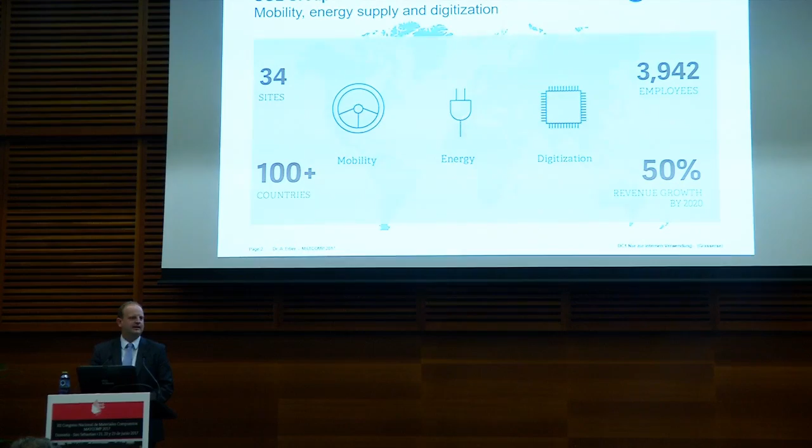SGL Group in the past worked, and also today, with the element carbon. But our roots are not carbon fibers, it is carbon electrodes, big electrodes used for recycling and melting steel. So the electrode steel, you use this electrode and consume it during the recycling. But due to the steel crisis, which had its kind of origin in China, we had some problems, and we sold this business unit to a Japanese company, Showa Denko, and the remaining SGL Group is presented here.

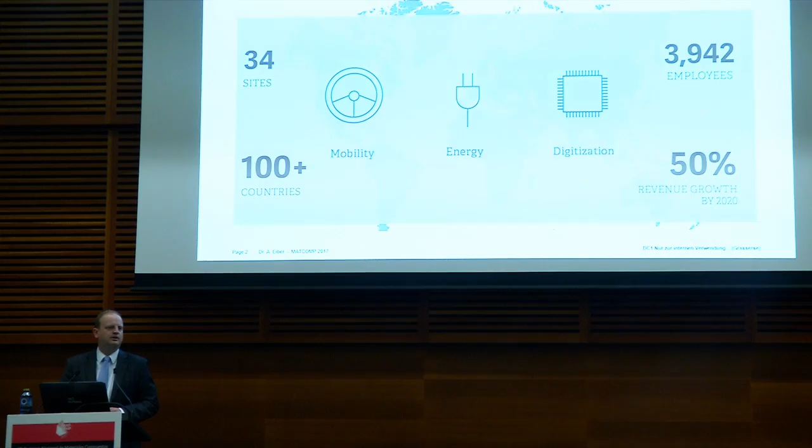We have two business units. One is a business unit for graphite materials and systems, so many of your cell phones, the lithium-ion battery anode material will be from us. A big electric-driven car out of the US has its electric battery system provided with our material. These are the things GMS is doing. The business unit where I belong to, Composite Fibers and Materials, yes, we have carbon fiber, but there is even more, and I will show you that in relation to automotive.

We invest nowadays, we want to grow 50% on the basis of 2015 turnover, in 5 years. So it's an interesting time, and in this time you can shape things, for example the Lightweight and Application Center.

The agenda of the presentation, I'll try to be in time, 45 minutes. Motivation and state of the art, where do we come from, automotive, what do we do today in general, but also SGL Group. SGL Group addresses the biggest automotive composite programs we have nowadays, and what will come next.

So coming next, comprehensive material systems. What can we offer here? What can we do in terms of supply chain? What can we do in terms of process chains? So I will show you some ideas, innovative materials and process chains.

And then last but not least, and this is something you already know: just taking a part and changing nothing but the material, from metal to composite, this will never ever be a success story. It will not be light, it will be heavy, and it will cost too much. So therefore, addressing upcoming automotive components means starting with a white sheet of paper and going for design and engineering, and then design and engineer again. That's the key to enable automotive in the future, and I will show you our thoughts on that as SGL Group.

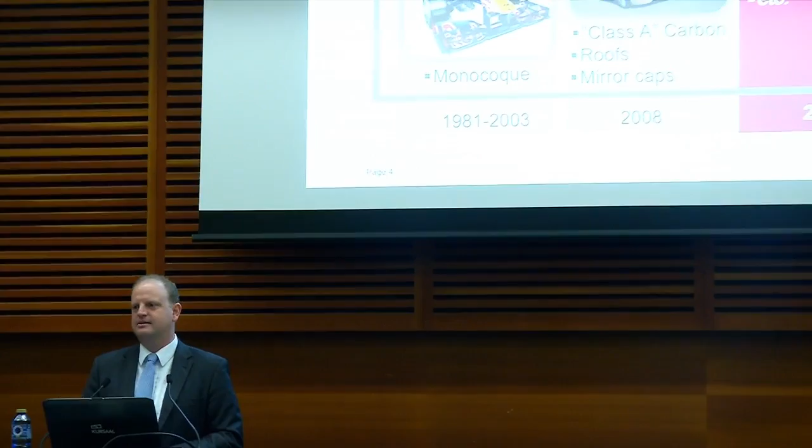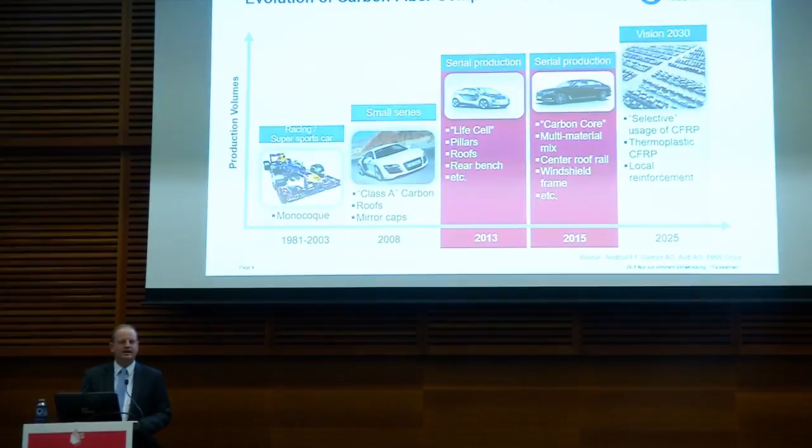Composites has a history coming from aerospace for sure. In automotive, you all know, on Sunday, Formula One race cars, everything done by hand. A rich race car team has 7 monocoques for each season, so that's the volume they have. They do it in pre-preg and autoclave, by hand. This is not related to automotive. Formula One is not automotive. It's great fun, but it's not the thing we are looking for.

Then we had the first small series, also as SGL addressed that. Audi, for example, the R8, Class A carbon, it looks very nice. You sell the look, therefore the price level is somewhere, but it's again not the thing we all want to discuss today in automotive.

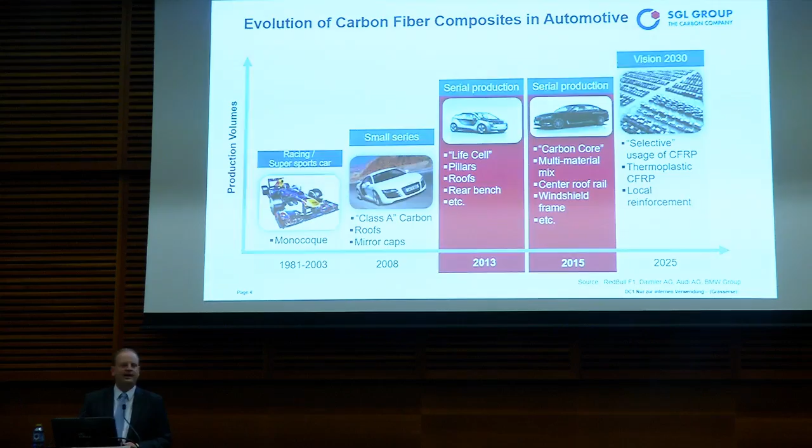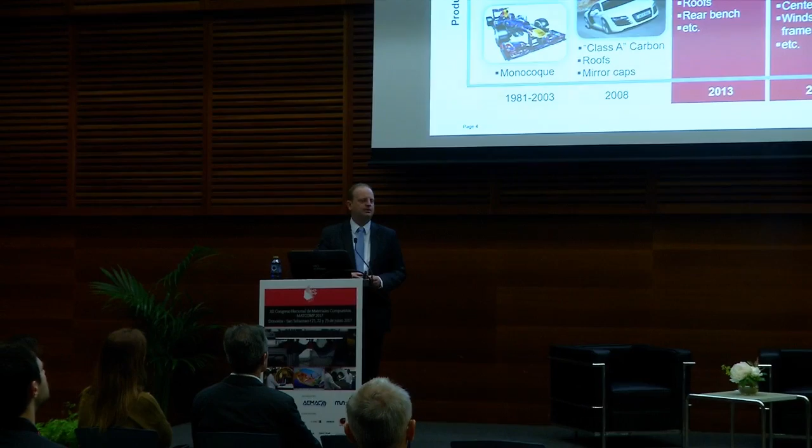One major step was the i3 and i8. Here, an OEM started with a white sheet of paper, drawing a carbon composite life cell. We built up together the infrastructure, the supply chain, and I will show you that BMW has made its lessons learned, because another product on the street nowadays, the 7 Series, addresses carbon totally differently compared to the i3 and i8.

So, the carbon core technology of the 7 Series. And what will come next?

Vision 2030. We will see that we will have a mixture of materials: high-strength steels, aluminum, and composites. Composites means glass fiber. At dedicated load paths, we will see carbon fibers. And if we are talking about carbon fibers, and we want real high volume, more than i3, i8, or 7 Series, real high volume, we will see many, many applications in thermoplastics. So thermoplastics reinforced by glass fiber, with dedicated areas reinforced by carbon.

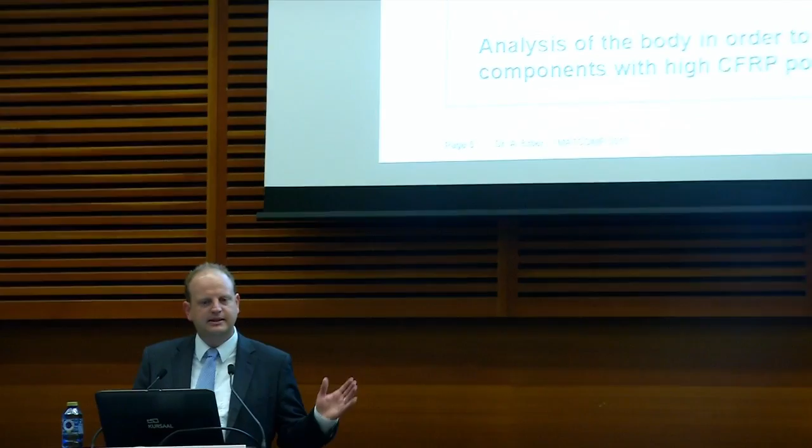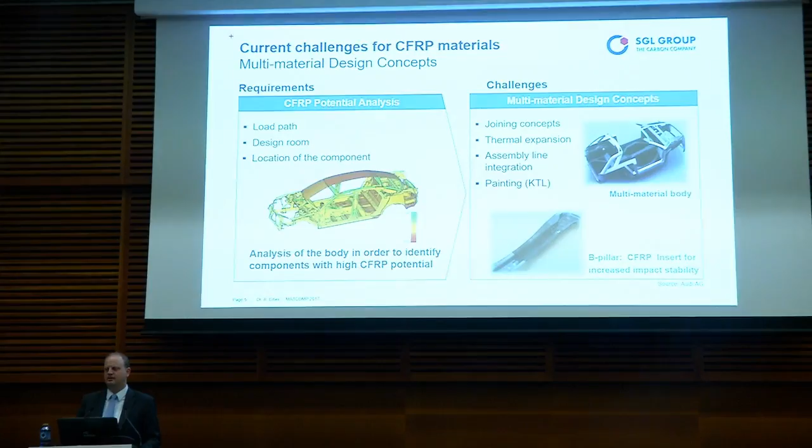What are the requirements? First of all, if you want to go into composites, you should analyze your car. This is one example: Audi developed this tool together with a university to look at where the load paths are. If you have a component like a knot where you have very isotropic load paths, maybe die casting of aluminum is a good solution.

But if you have parts, components, like the windshield or the B-pillar, where you have clear load paths, then it makes sense to use carbon fiber, because a carbon fiber with a clear direction can use its performance very well. But then again, this means don't make a quasi-isotropic laminate—that is not the right approach. I know we have it today, but in the future we will also see laminates which are really load-path oriented at these kinds of components which I showed.

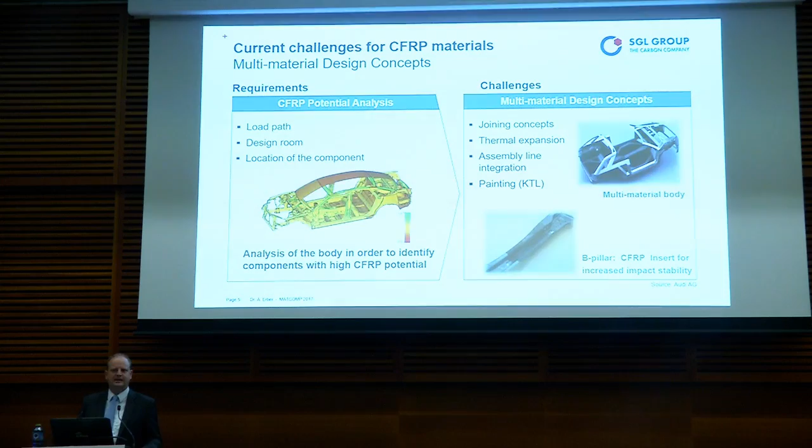But then there are still some open challenges. How do you join these materials? Multi-material design, you have to bring them together. Different thermal expansion, delta alpha topics. How to cope with corrosion, how to integrate such components into existing assembly lines. Existing assembly lines in automotive mean spot welding, and now we have composites here. E-painting, the KTL, is a challenge. So these challenges can all be addressed through process chains, and that's a nice thing for us, by the materials.

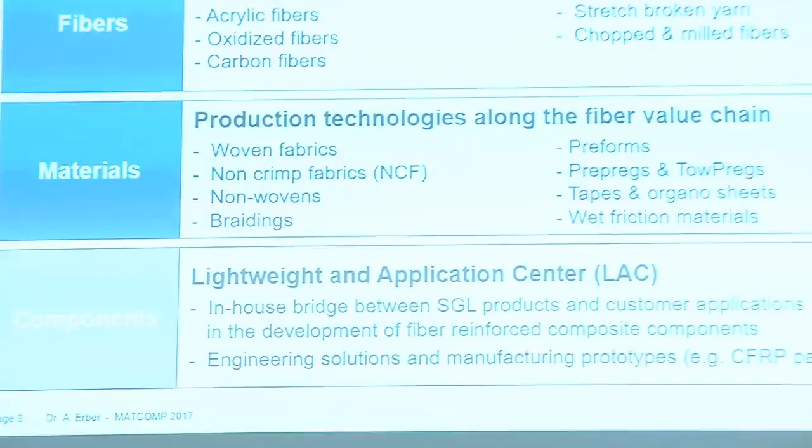We have some materials, yes, we have fibers, we have carbon fiber, that's true, but we also have acrylic fibers. Why do we have acrylic fibers? Because we need them as a source for our precursor. So we produce our precursor by our own. We also have precursor supply through a joint venture with Mitsubishi Rayon. So there are different sources. The precursor, polyacrylonitrile, is an acrylic fiber.

Therefore, we have a plant in Portugal, next to Lisbon, for acrylic fibers. And we have an acrylic fiber business, going into clothes, roofs of convertibles, tennis balls, things like that.

And the precursor for the carbon fiber - yes, we have carbon fibers. We have oxidized fibers going into aerospace, for example brake discs. We have some specialities like stretch broken yarns, chopped fibers, and many other materials.

You see the list of materials, starting from textiles, woven, non-wovens, non-crimped fabrics, but also impregnated textiles like prepregs, or in the thermoplastic world, organosheets and UD tapes.

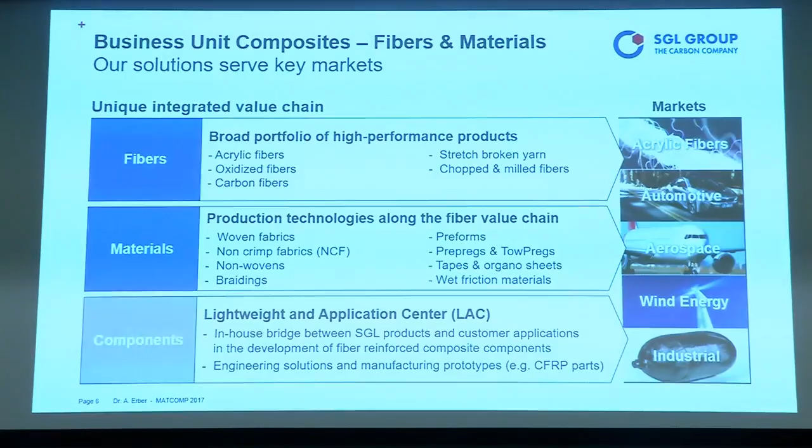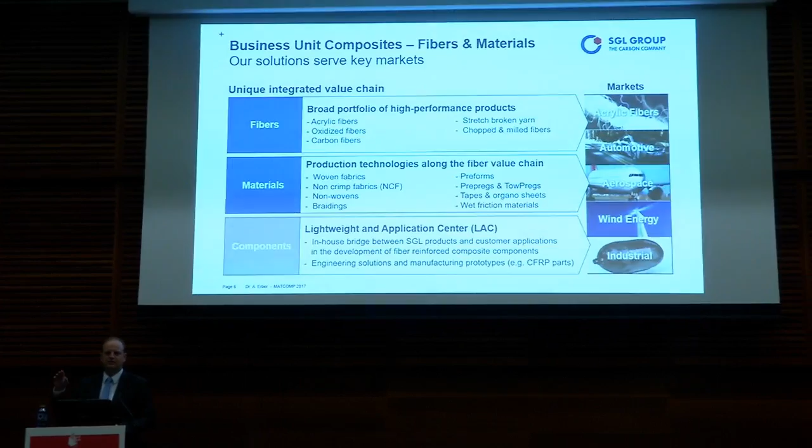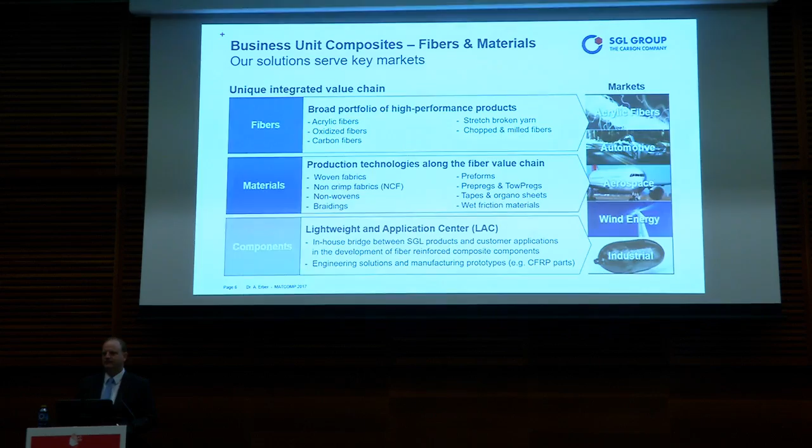And we have this activity, lightweight and application center, because we learned - and I will come to that later - that just putting a material on the table, having a price tag on it and some mechanical data, nothing will change. It will happen nothing. You have to support your customer to bring the material via design, engineering, prototyping to an application. And if this application is good with respect to costs, lightweight, but also robust production, then you have a chance that this component will be in composites, and then companies like SGL have a chance to sell a material.

We have a global presence, not very strong in Asia today. We have to change that. So it is very focused on Europe.

So we have the precursor plant, following now the process chain. We have the precursor plant in Lavradio, together with Mitsubishi Rayon precursor joint venture in Otake, Japan. We have two sites for the carbon fibers, one in Scotland at Muir of Ord. You don't know Muir of Ord, but you know Loch Ness - it's next to it. At Loch Ness there is the carbon fiber plant. Another one is in the US at the west coast, Washington State, Moses Lake.

Then we have several material plants in Gardena, California, Philadelphia, and in Germany - north of Germany, south of Germany, Wackersdorf in Bavaria. And together, you may know, with Benteler we have a joint venture, Benteler SGL, producing components together. So it is from the acrylic fiber downstream to the component and the assembly of modules, what we are covering as SGL Group.

Comprehensive material systems. You will find this kind of puzzle three times because we are talking about toolboxes. This is our textile toolbox. We also have a thermoplastic toolbox and a thermoset toolbox. Textile toolbox means we have textiles like woven materials, fabrics, non-crimp fabrics, but also smaller, thinner, not as wide textiles to do local reinforcement, and non-wovens to have a more isotropic behavior.

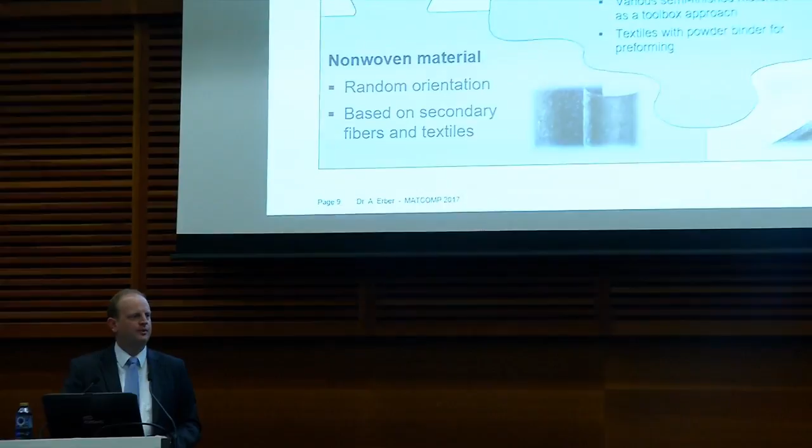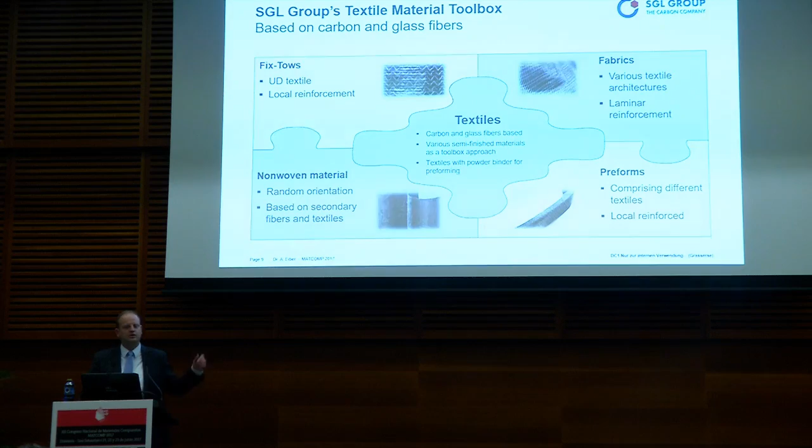And you can get these textiles with different sizings on the carbon fiber. A sizing which is friendly to epoxy, a standard sizing you already know. We also have sizings dedicated to thermoplastics, and in the thermoplastic arena we have also developed a sizing which works pretty good with in situ polymerization, so processing caprolactam for example, you can do with these kinds of materials.

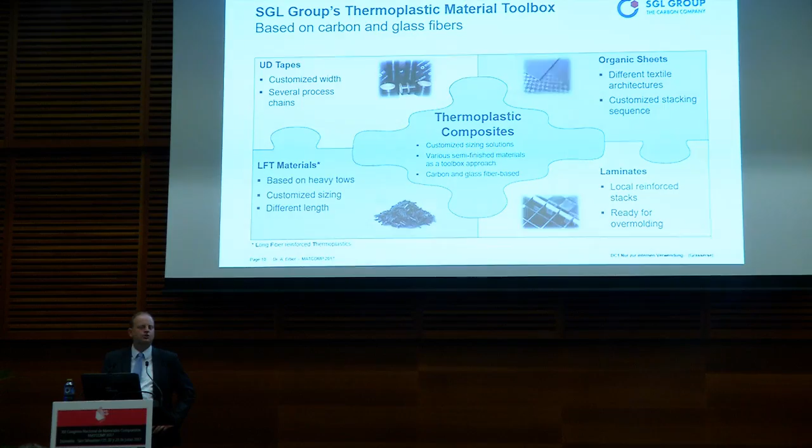And you can combine all of these materials, therefore toolbox, and this puzzle is kind of how we want to show it to you. And you can have it in carbon and in glass, and again that's important, because we will see - I already said that - in the future we will have composite components which have much glass fiber, and only where it is needed we have the carbon fiber. Therefore you have to do it like this toolbox, you have to combine it, and that's possible with these materials.

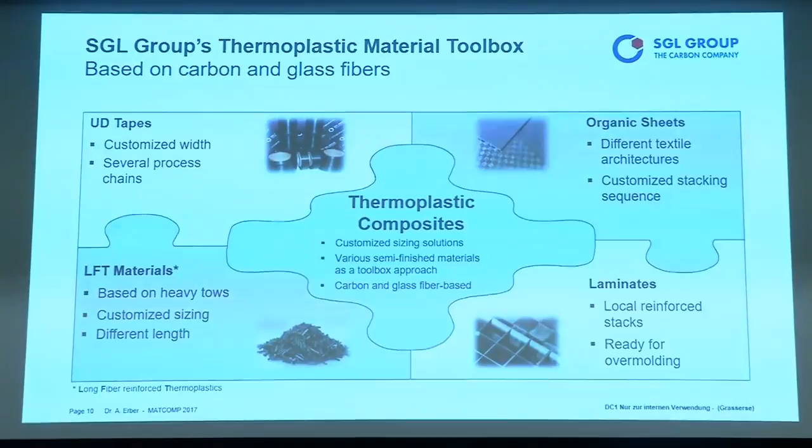And if you are now wondering why someone from SGL is saying some limited carbon fiber is okay, just imagine if every car had only 1 kilogram of carbon fiber, the whole world would be sold out. Carbon fiber does not have that much capacity compared to steel and aluminum, that's clear. So what are the advantages of the thermoplastics?

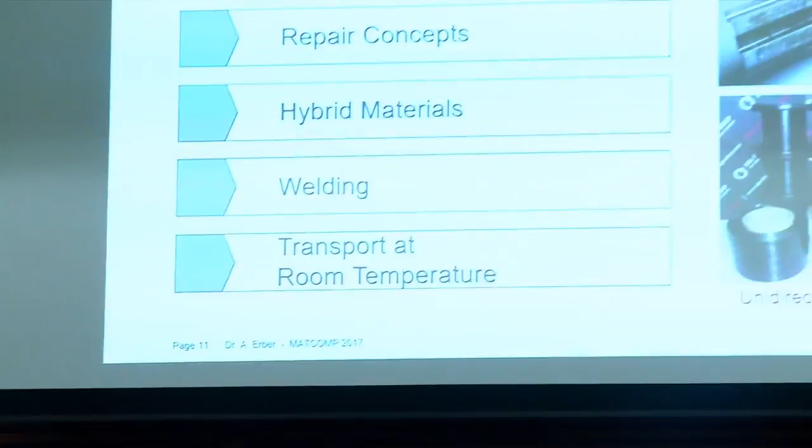Why do we think we will see it at the highest volumes? You can combine the materials, what I already showed. You can address recycling very easily because you can remelt it and use it again. You can weld it, so this offers new process chains to build up the body in white. And what's also nice, you can get away from the much more cost-intensive press tools, because you don't have to infuse the material, it's already there. You don't have to ship it cooled. So these are all advantages. And then you can have very low takt times at the pressing at the tier 1 or OEM. These are all advantages why we think we will see

thermoplastics at high volume production. Now going more into the material.

I said we have a nice sizing working very well for thermoplastics. Here is an example for polyamide 6, nylon 6. What you can see here is the carbon fiber. It's a 50K carbon fiber, 50,000 filaments, with epoxy sizing, epoxy-friendly sizing, embedded into nylon 6. And I hope you can see it: after fracture, the carbon fibers are naked. There is no connection, and you can also see there are holes. So this is a performance which is okay, but it's not good.

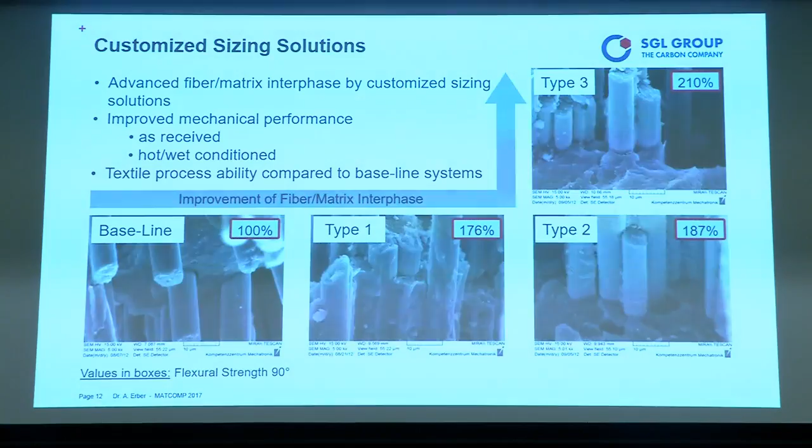You can do it better. Now we have clever chemists within SGL. I don't understand chemistry, but I can see what happens. They make different mixture formulations of the sizing. For sure, there are some particles of thermoplastic in the sizing. And then you see, after the breakage of the specimen, there is still matrix material at the fiber. There are no holes like here, and this is a 90-degree bending test, so fully stressed at the fiber-matrix interface. You see, if you just change the sizing - and a carbon fiber supplier can do that - you can get much, much more performance.

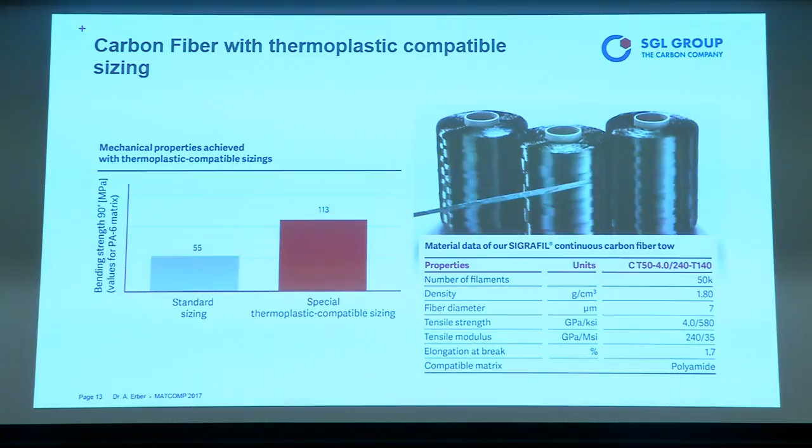We've had this product on the market for 3.5 years, selling these materials to customers doing organosheets and tapes. But we also produce tapes and sheets in-house. So we have UD tapes based on a 50K heavy tow. We have it at different widths, and we can do that customized as well. So if you have a machine which needs a tape of this or that width, we can do it. In this case, it was a nylon 6, 50K heavy tow, but if you want a different kind of polymer, here we are flexible. This is important - we have no relationship to any polymer supplier.

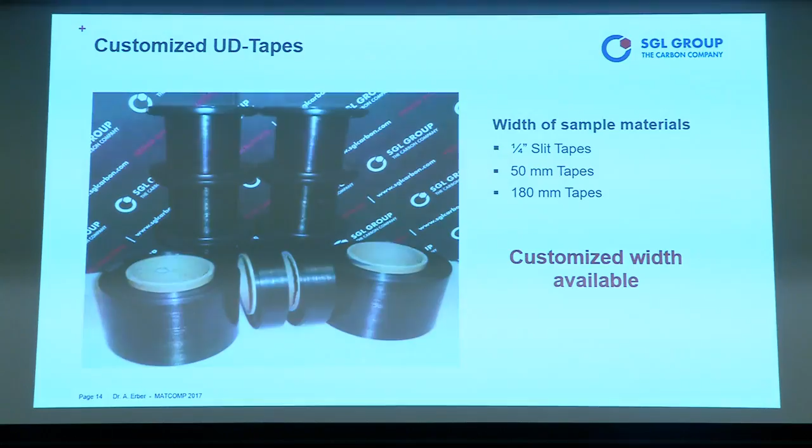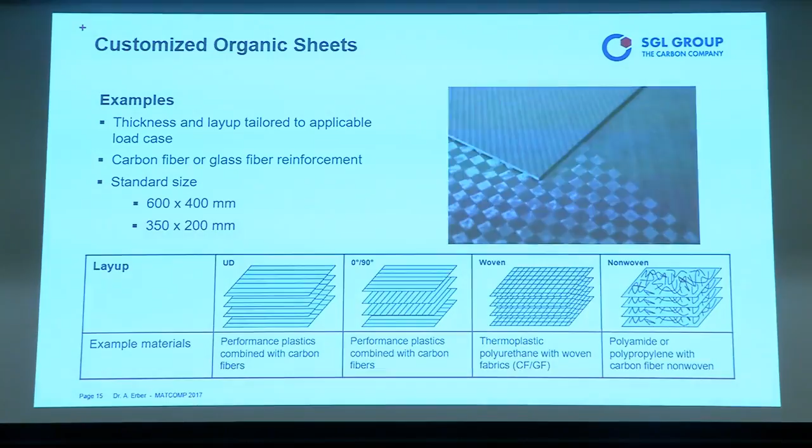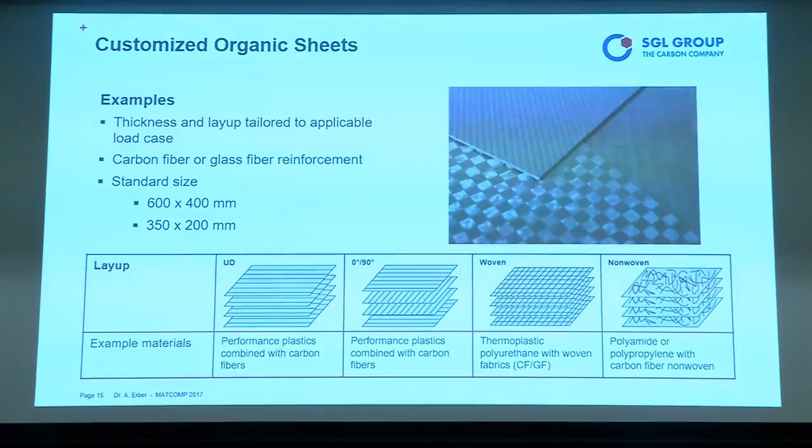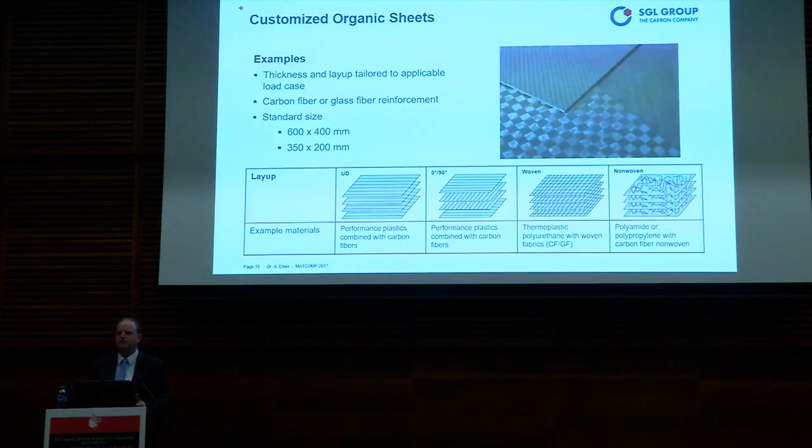So the customer defines it, maybe it's a strategic definition, and we can do that. Customized organosheets based on UD tapes, for example, with different layups. But we also have slitted UD tapes to use in a weaving loom, so these are fully impregnated UD tapes, woven. With this kind of material, you combine the toughness of a weave - think about crash, energy absorption - with all the advantages of thermoplastics we already discussed. So this could be a nice idea.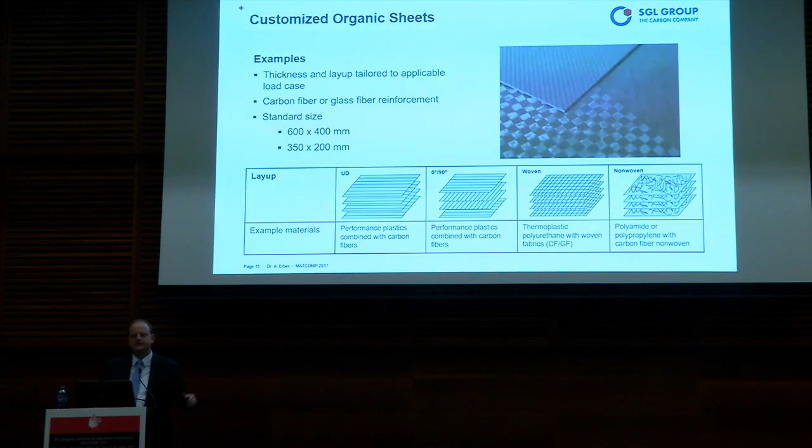And what we also have here are nonwovens. These nonwovens are based on secondary carbon fibers. Secondary fibers means we produce fabrics at our plant in Wackersdorf - I'll come to that later. Customers cut out their components from the fabrics, and there are cut-offs, and these cut-offs are recycled. Recycling sounds a little negative, it's not that nice - it's secondary carbon fiber, and we produce these nonwoven materials. We combine it with polypropylene, for example, and then we have an organosheet based on secondary carbon fiber, addressing the thermoplastic process chain. LFT material, I think that's clear for you - we can use that for injection molding.

What's nice here again is it's based on a heavy tow 50K fiber with a thermoplastic sizing at the surface. This is something unique.

And then the toolbox that's missing: standard thermoset materials, the same philosophy, you already know it. We have pre-preg material with a certain width. We have a so-called TowPreg - I'll show that in detail later. It is a yarn which is fully impregnated by a thermoset matrix, so the fiber volume content is already set. It is somehow cured, it's not tacky, it's dry, but it's still a textile, not a rod. So you can use that for local reinforcement, for fiber placement technologies. We also have these impregnated nonwoven materials.

These materials you can use to build out the ribs again, for geometrical stiffness, and we can supply, if interested, stacks and adhesive films.

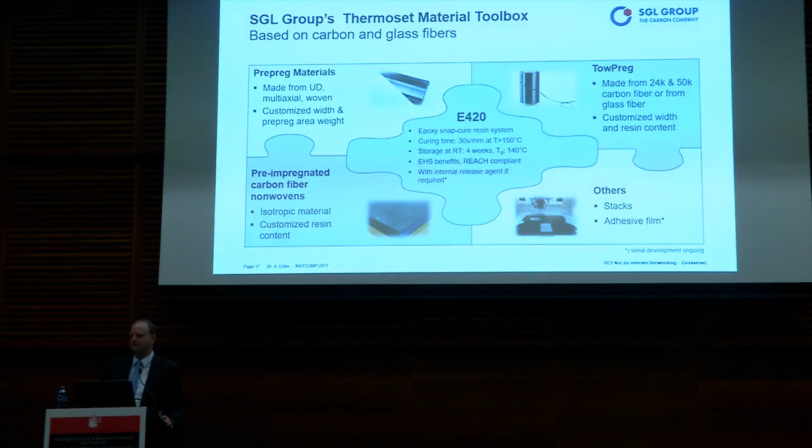E420, not related to food, that's the code of the resin. What is it? It's a so-called snap cure resin, a resin system you can store at room temperature for 4 weeks. It has a nice TG of 140 degrees C, and it cures in 30 seconds per millimeter. So it's fast curing, a snap curing system.

And you can get these towpregs, for example, again in carbon and glass fiber. Here we have it, you can download the presentation if interested in much more detail.

Here they are, comprehensive material systems. What do we use already today? Let's talk about composites today.

Composites in automotive means there are several big platforms. One is the Audi platform, Audi MSS modular sports car system. This is a platform where you have the R8, as well as the Lamborghini Huracan.

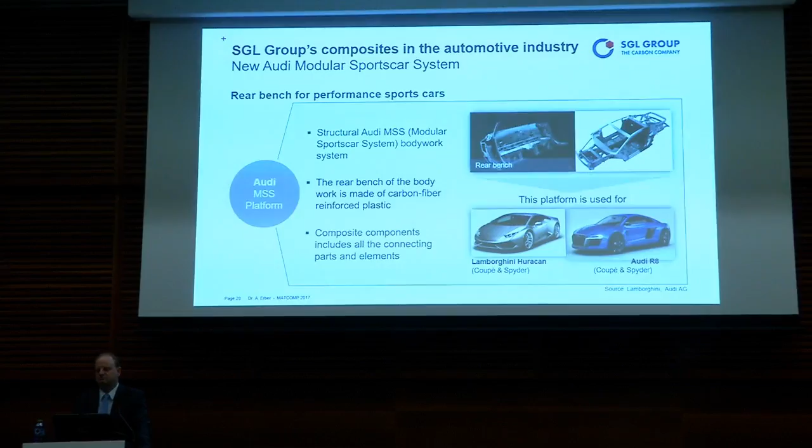Regarding our value chain, this is a nice story because we produce the carbon fiber, we produce the fabric, we produce the preforms, we do wet pressing, RTM and so on, so we produce the components, and we assemble the components into the module, the rear bench. This rear bench module then goes to Audi or Italy for the final assembly line.

This is very good because if you master the entire value chain, you can learn a lot back and forth - designing a material means problems or advantages in the process chain here and there, and vice versa. What are the challenges of wet pressing with respect to a fabric? We can steer this very well if we have the entire value chain in hand.

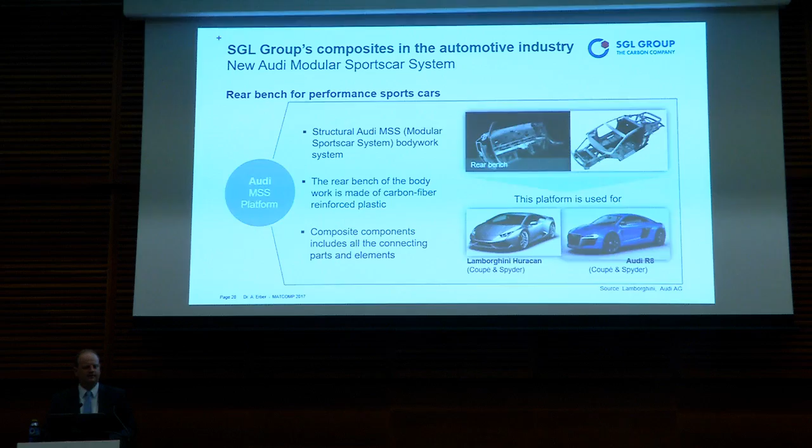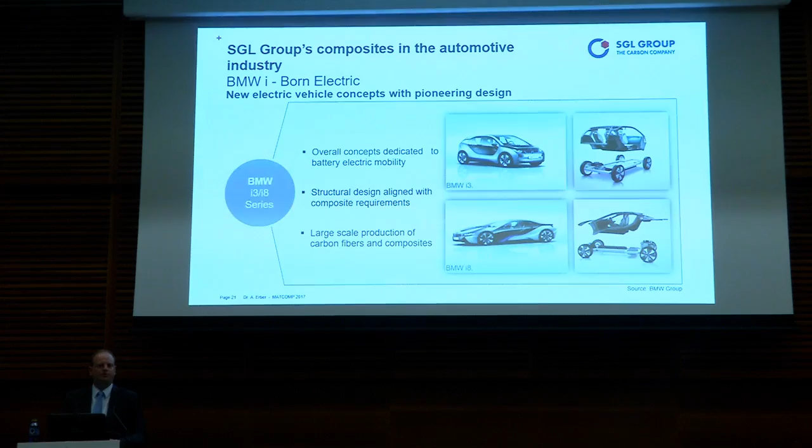Another story, i3, i8. I'll do it a little quicker because I'm sure you already know that. It is a car dedicated to carbon composites. The lifestyle started from scratch, a composite component, a composite body in white.

Together with BMW, we built up the supply chain. SGL is producing with Mitsubishi the precursor. The precursor is then shipped to the US, Moses Lake. Why Moses Lake? It's 100% green energy, and it's cheap energy, based on hydropower. That's why we selected Moses Lake.

Side story, Moses Lake, you can read about it in the newspapers. We have installed capacity of 9,000 metric tons there. This is the biggest carbon fiber plant on Earth. These carbon fibers we then ship, really with a ship and by train, to Wackersdorf in Bavaria, because it's a green story.

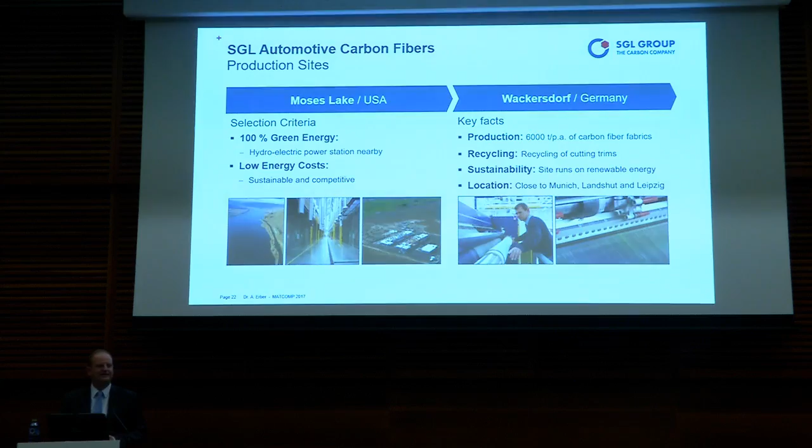In Wackersdorf we produce the fabrics. We also produce there non-wovens based on the cutoffs, the secondary fiber, you can remember, that we can do at Wackersdorf. Here we have a capacity of 6,000 tons. There's a gap, 9,000 versus 6,000 - the other material is used in direct processing, let's say braiding, for example.

Braiding, 7 Series, the new product on the market from BMW - you see this is not much related to the design of the i3 or i8. Here we have a pure multi-material design approach, so we have different materials next to each other, and also within one component multi-material.

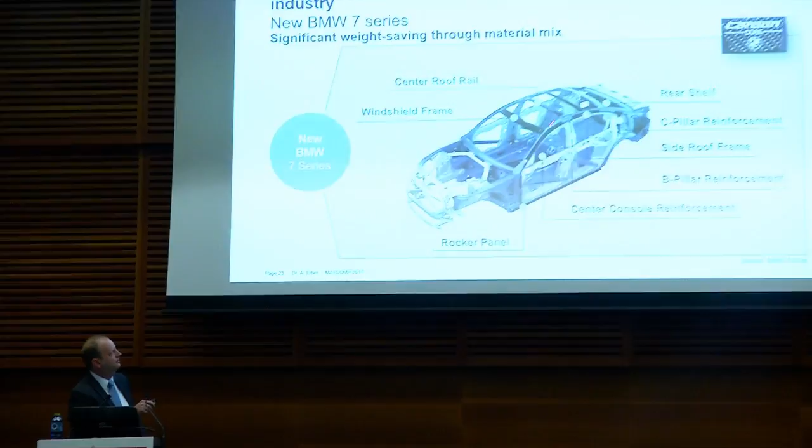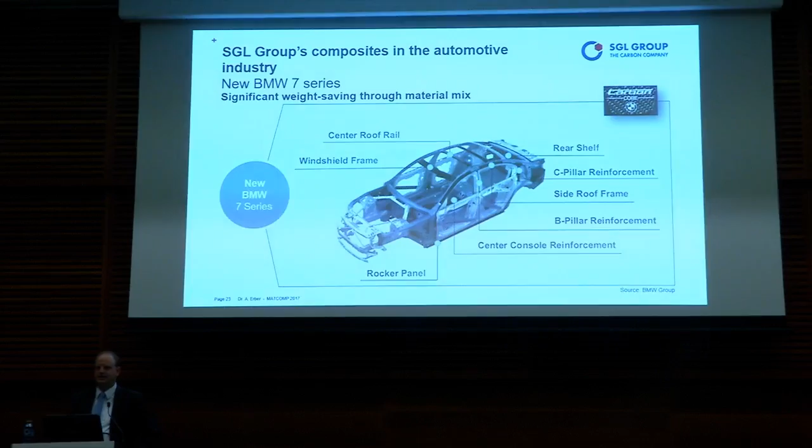The braided side frame is overbraided onto a thermoplastic tube, overbraided textile, then RTM, epoxy resin, and then this composite part is assembled with a metal C shape. The side frame is a multi-material component combining metal and composites, and this is then integrated into a multi-material body in white.

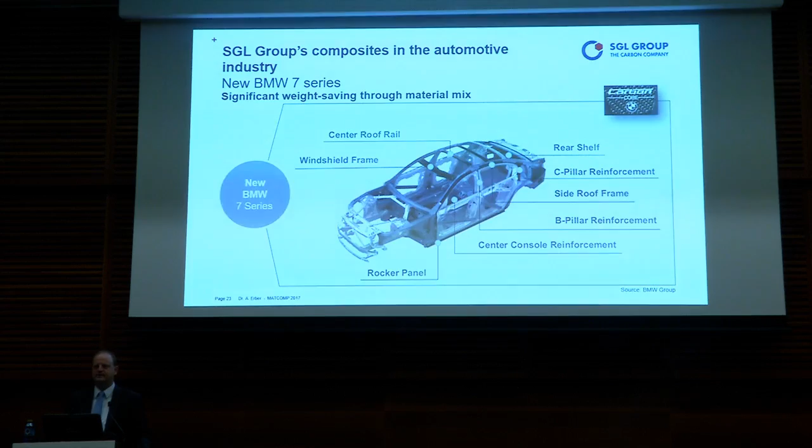There are also some other components, and it's a nice body in white because it addresses so many technologies - there is wet pressing, there is RTM, there is kind of SMC, there is pre-preg patching of a B-pillar, braiding - so this is very good, and I would say this reflects the state of the art today.

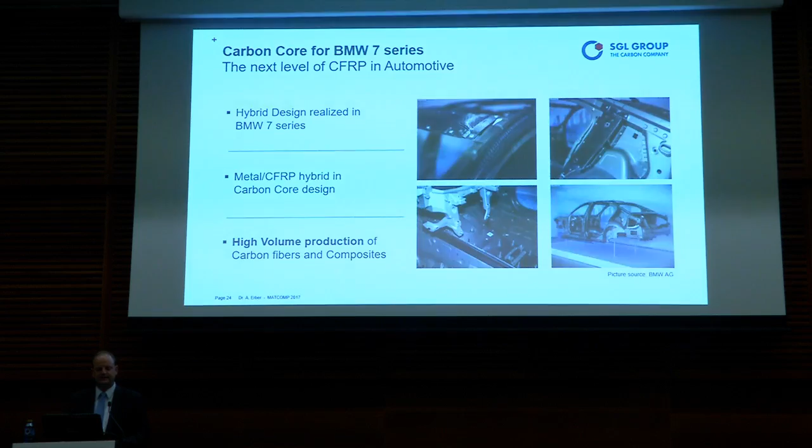Here you can see some close-ups. As I already said, it's a hybrid design, and it's real high-volume production.

Higher volumes we can find within SGL Group at the leaf springs. A leaf spring, typically done in steel - here we have it in composites. It is glass fiber, because it has to be glass fiber - a carbon fiber would be too stiff, that's clear for you I think - therefore we have it in glass fiber.

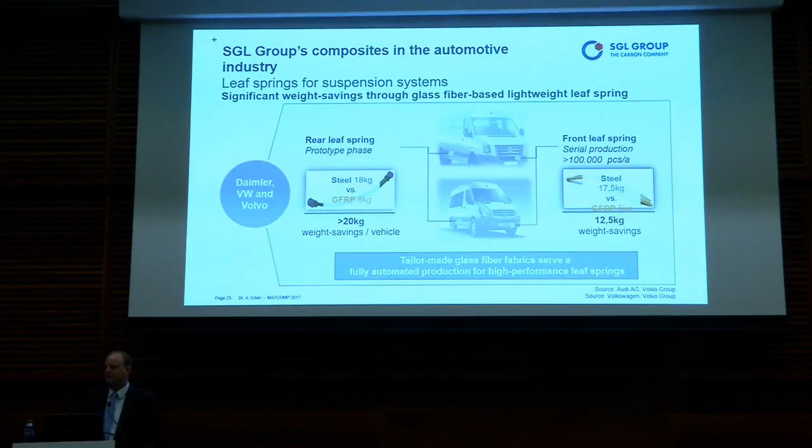And again, we buy a glass fiber, we produce the textile, we produce the preforms, we produce the leaf spring. And then we can gain this lightweight potential at the Sprinter or the Volkswagen Crafter.

It's a nice story, but even much more impressive is this one here, at the platform of Volvo, where you have also the XC90. We have installed a capacity and produce over 550,000 pieces a year of continuous fiber reinforced polymers.

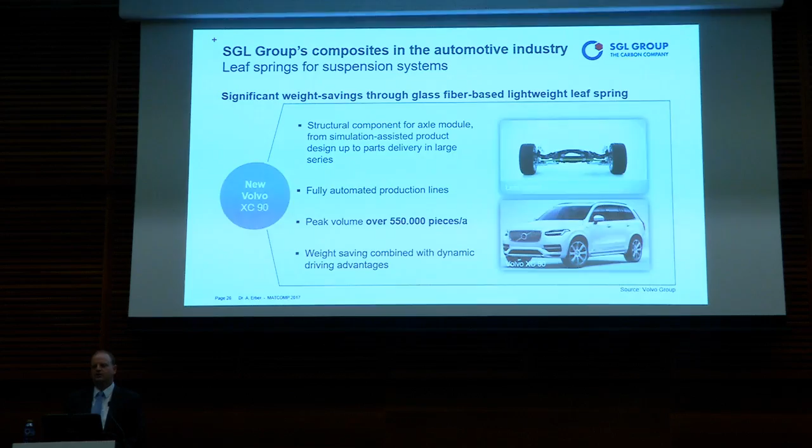So the question is, can you ramp up, can you scale composites? The answer is already there, and it's realized. We do it day by day in Austria together with our partner Benteler.

Now the question is, what do we need to address upcoming platforms in the future? We need innovative materials and process chains, and we need design and engineering capabilities. This is a project I want to show you in the framework of the leading edge cluster MAI Carbon, MAI - Munich, Augsburg, Ingolstadt. So you can see it's automotive and aerospace.

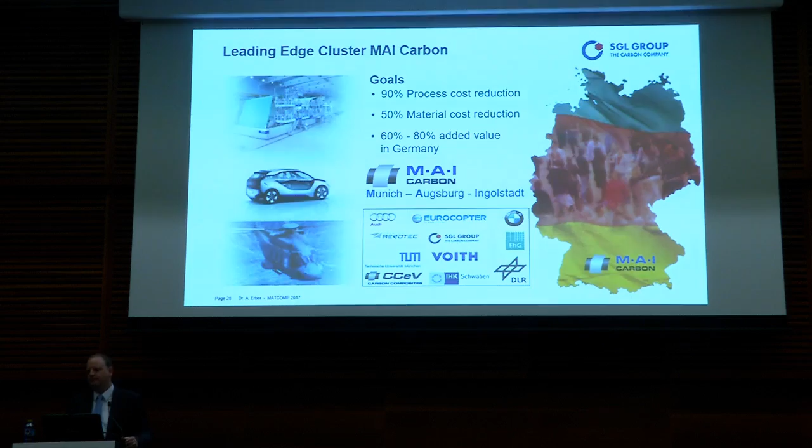What have we done there? The classical process chain you see here: you have a fabric, you cut this fabric, you shape the preform, you cut the preform, you bring it into an RTM mold, you inject resin, curing system, and then you have a finished component.

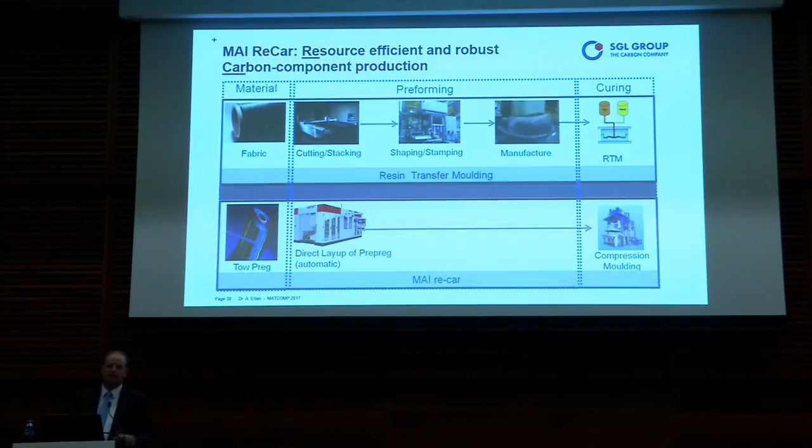We developed the process chain. We have a towpreg - it's a kind of 3D printer, a fiber placement machine - and then we just have to mold it. Infusion is no longer relevant because the towpreg already has the resin system inside.

This machine, which we had during the project, we used at Broetje, and since last week we own such a machine ourselves. We have it in Meitingen at our plant. It runs 16 lanes in parallel, quarter inch width material, and you can deposit it.

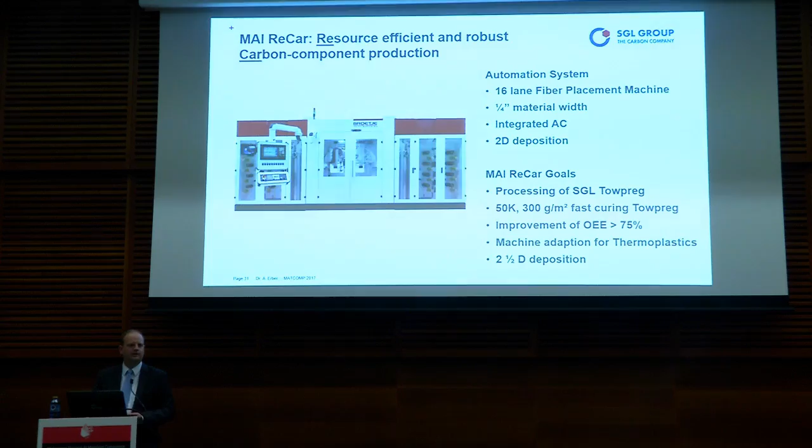And these 16 lanes, each lane you can steer on its own, you can stop and start. So you can imagine if you have cutouts, complex shapes, there is almost no scrap. This is a dramatic advantage compared to fabrics and RTM technology.

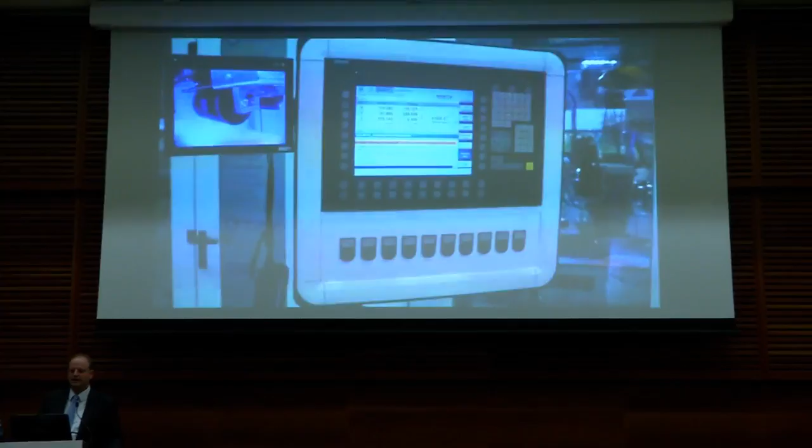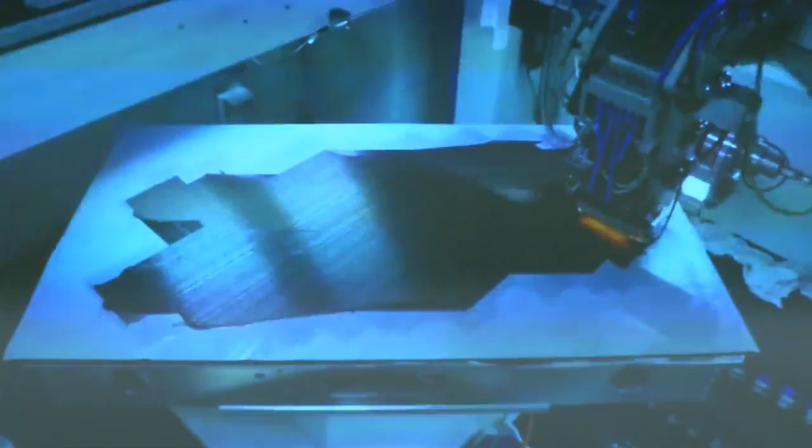So here's a video of how this machine is working. You do your design at a computer - CAD, FEM - and then via a CAD-CAM module you transfer it to the machine, and it works like a Tesa roller.

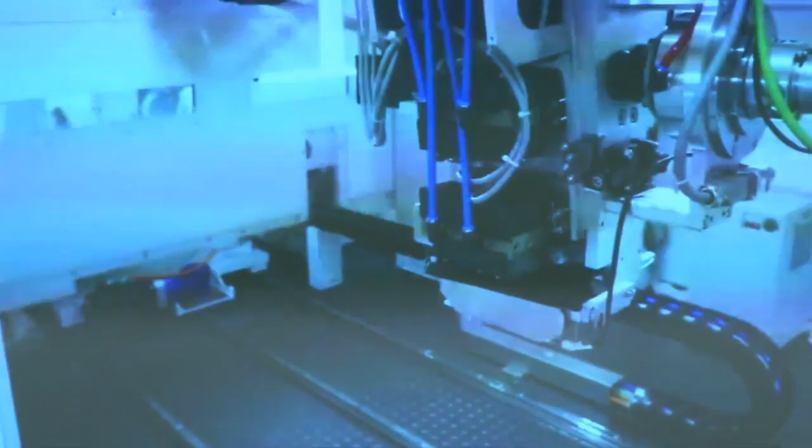It's a linear axis movement, and within the head there are these 16 lanes, each steerable on its own. You activate the pre-preg material, the tow-preg. You need heat to activate it, because at room temperature it's tack-free. So you lay up the material, bring it out, you have to cut it somehow, and then you have to stamp and cure it.

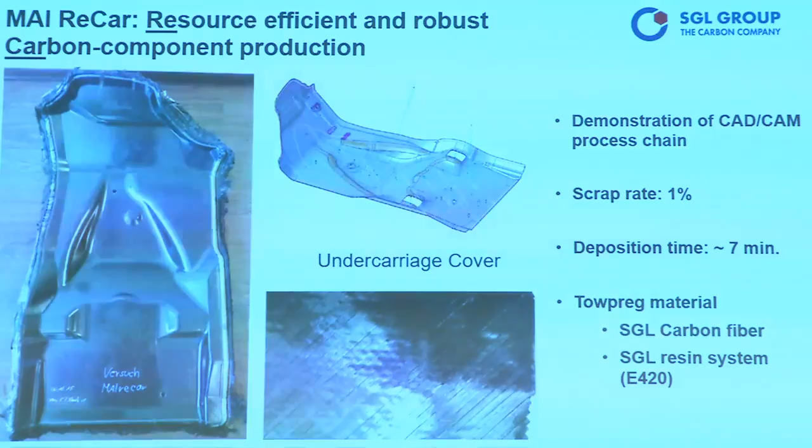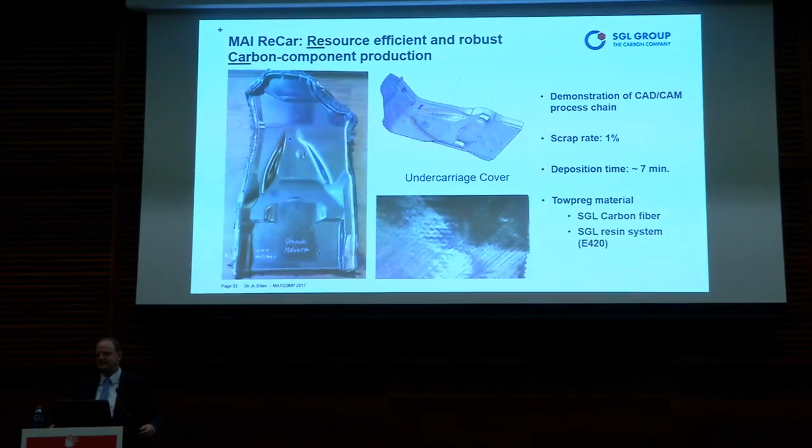Within MAI ReCar, we made a BMW component - an undercarriage cover - and it has a certain deposition time. Is it high, is it low? We can discuss that, but at least it is what it is. What's important is we have a scrap rate of only 1%. Now compare that with a non-crimp fabric, where you cut out this kind of component.

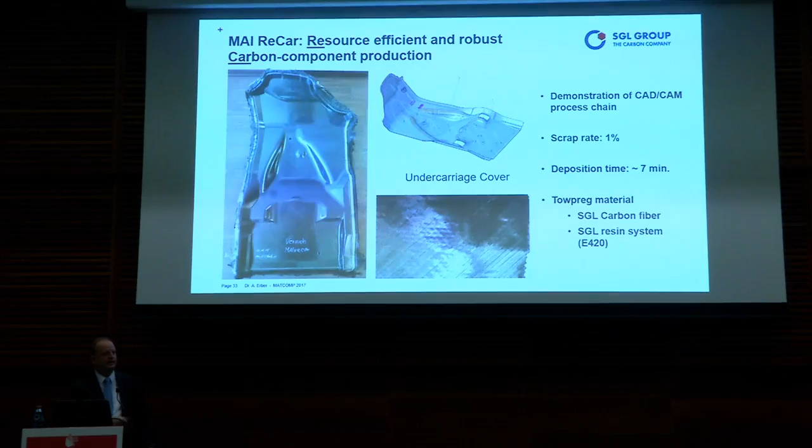I think it's clear what the main advantage of this kind of process chain is. Design and engineering - this was the slide, and I use it again and again, showing the motivation for lightweight applications.

If a raw material supplier - and you said SGL, that's true, is a raw material supplier - has only fibers and materials and does not understand what's happening at the application, and cannot support or discuss with the customer the process chains and the ramp-up scenario, you will have a problem. Therefore, there was in the past a gap.

We decided we wanted to close this gap with the Lightweight and Application Center, and we started this activity at the beginning of last year. In January 2016, I was the first and only member of this Lightweight and Application Center, and today we are close to 30 people working in the center, comprising design engineers, finite element engineers, prototyping and process engineers, as well as testing.

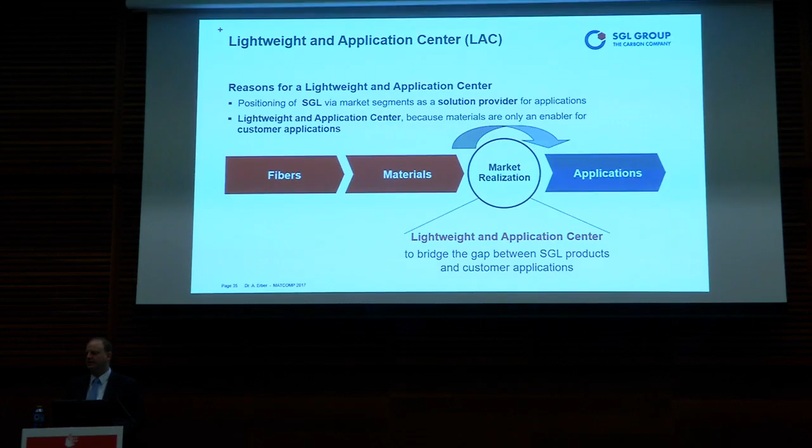So what can we do there? We can, from a white sheet of paper, support with a concept. We can bring this concept to CAD and FEM, and we can build up a prototype and test it.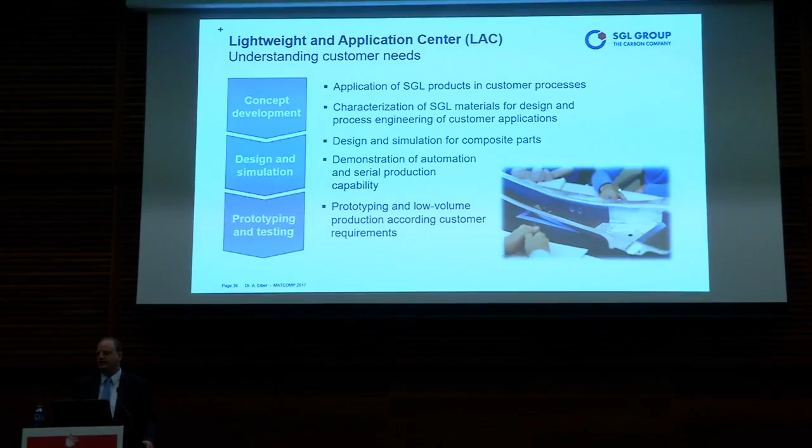We can also do the full factory layout, virtual factory simulation, and analyze takt time and material flows. Still, it is the idea that the customer will do that and buy the SGL material.

These are services along the value chain, and I think you are aware of this value chain and what we can support. If someone needs only one element, we do it. If someone needs the whole value chain, and very often we see people have decided to do something in composite but have no idea how, then we do the whole value chain.

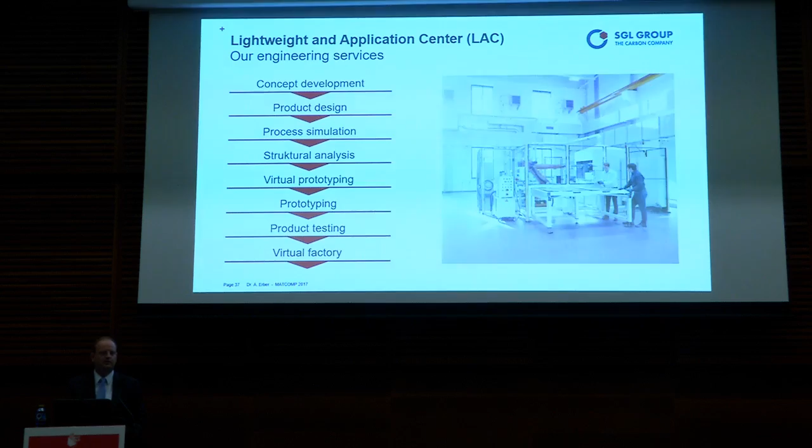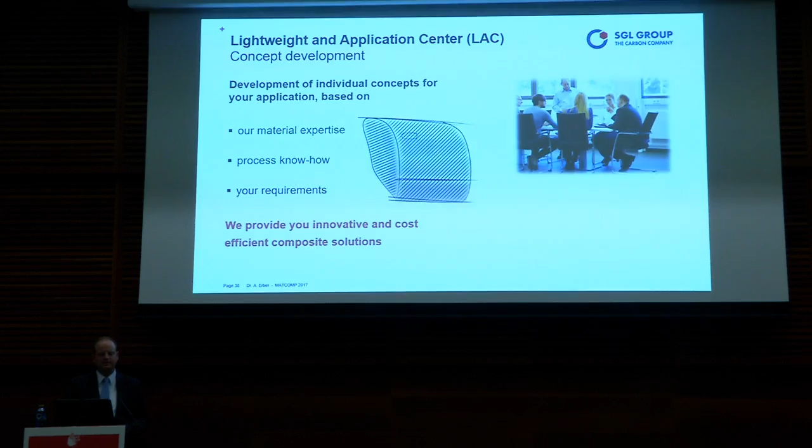It starts with concept development. We know our material, and I hope I could convince you, out of the BMW, Audi, and Volvo projects, that we know process know-how. We have understanding about high volume production, and the customer from time to time knows his requirements.

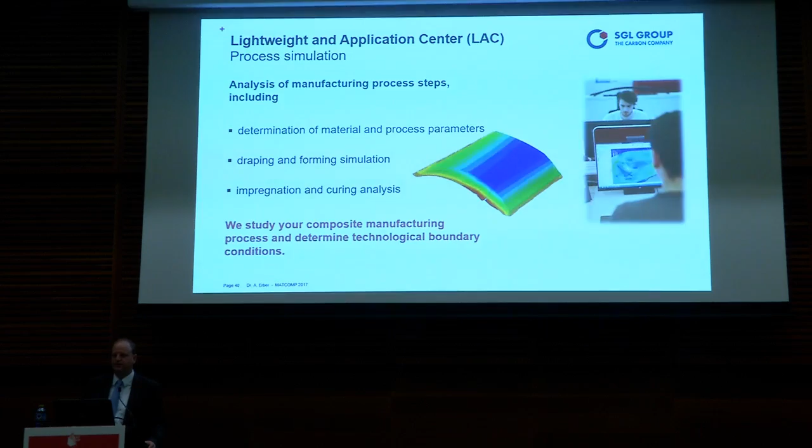Then we select a concept, bring it to CAD, do the laminate design, and do the process simulation - for example draping simulation, what you can see here, curing, impregnation - and then we can dimension the material: stacking sequence, layup, thickness, strength, stiffness, crash, NVH analysis.

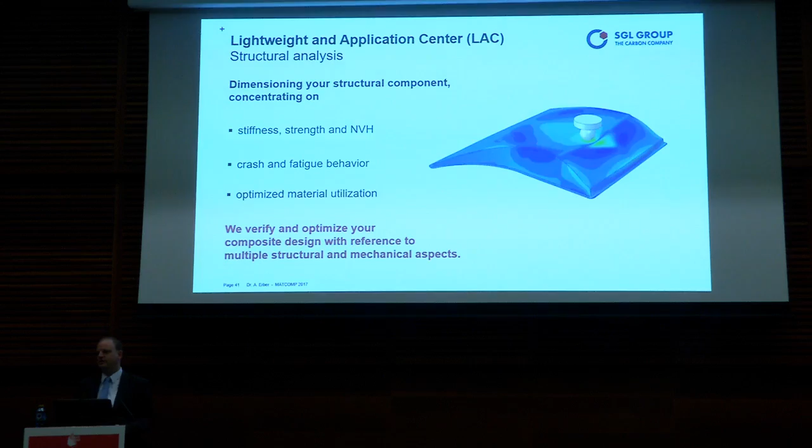Then we can produce this prototype in the computer. We have all our production cells at the center as a digital mock-up, and then we can produce it there. We can give the first hint of what could be the takt time, and what could be the investment you have to do if you have to invest in parallel lines, for example.

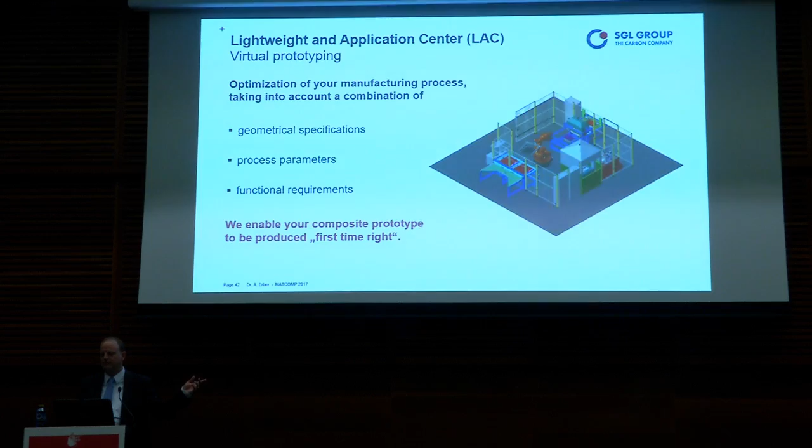And then we can produce - you see it's the same cell. In that case it's a wet pressing cell, what is shown in the image. We can produce the components. This means we have, again, to address our three material portfolios, our three toolboxes: textile toolbox, thermoset, and thermoplastic.

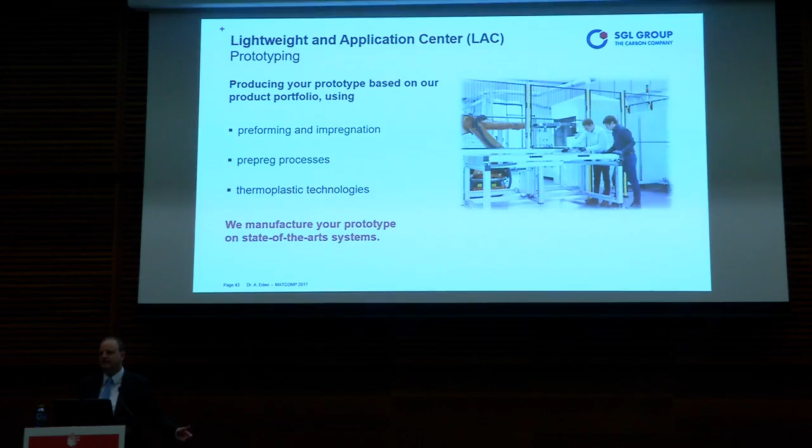This also means a lightweight and application center is a heavy investment, because if you invest now in RTM, tomorrow there will be a project in thermoplastics. If you go for wet pressing, you will see something in pultrusion. So you have to have all these technologies in-house, and then you are prepared to discuss with automotive customers.

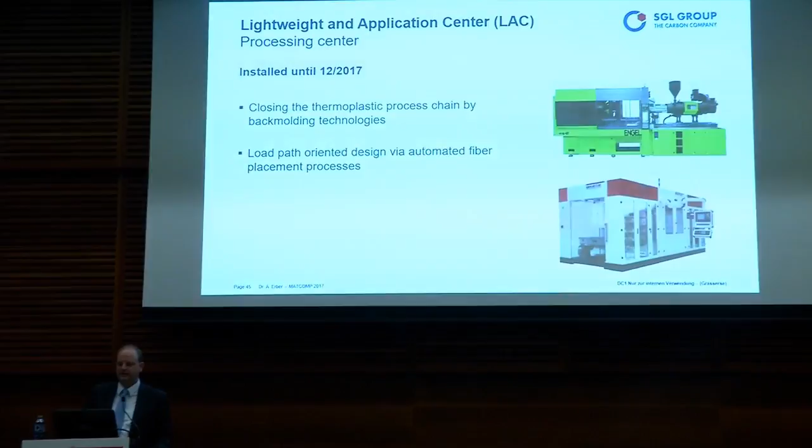This means we have today 1,000 square meters, and at Christmas 1,500 square meters, where we have equipment installed: pultrusion, robot-based filament winding, RTM, wet pressing, thermoforming. We have an autoclave as well, because we're also doing aerospace, cutters, and so on. This machine we installed last week, and an injection molding machine will come within the next 4 weeks. I don't have it directly in mind, and some others by Christmas.

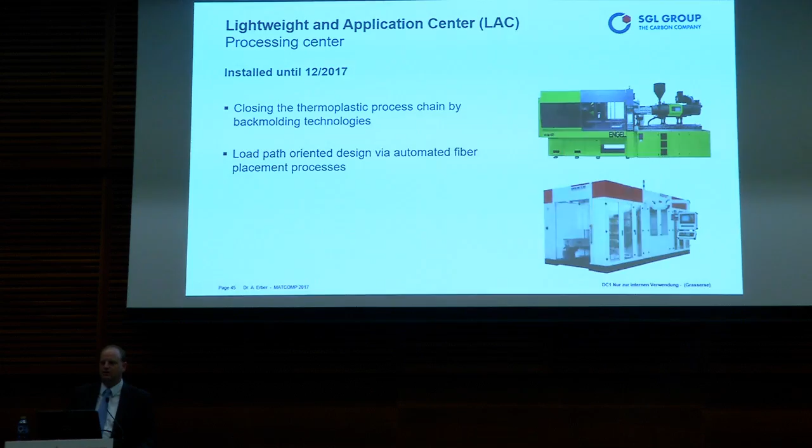Design and engineering, we have fully fledged all capabilities. We are using CATIA, we are using Abaqus. If you want to go for LS-DYNA, PAM-CRASH, and so on, we will go for these licenses.

One example, if you have all these capabilities in-house - and here we did it together with Fraunhofer because it's a big machine - is this front end, and it shows again the toolbox approach, the toolbox of thermoplastic. At this front end, we have the whole structure first of all produced in injection molding. The granulate was reinforced by glass fiber, so LFT glass fiber - you can see it here. We have dedicated load paths with unidirectional carbon fiber-based tapes.

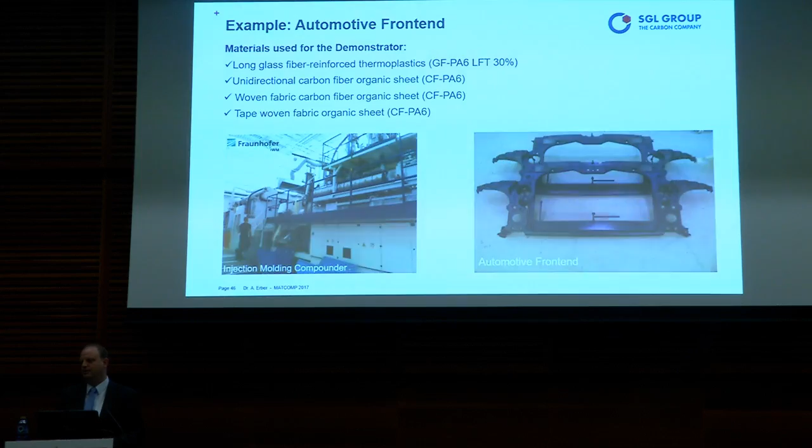I know it is not symmetric - on one side we have tape woven sheets, on the other side we have standard organo sheets, because it's a demonstrator meant to show that you can produce in a super short takt time these kinds of components comprising several materials based on thermoplastics. So to sum up, yes, carbon fiber reinforced polymers is still a small niche.

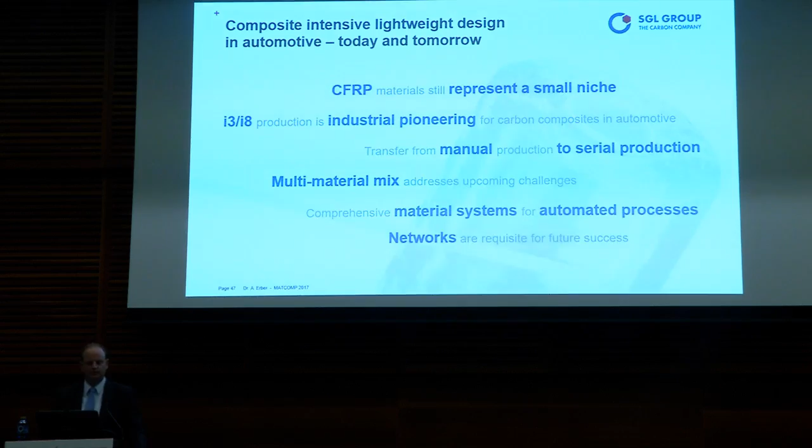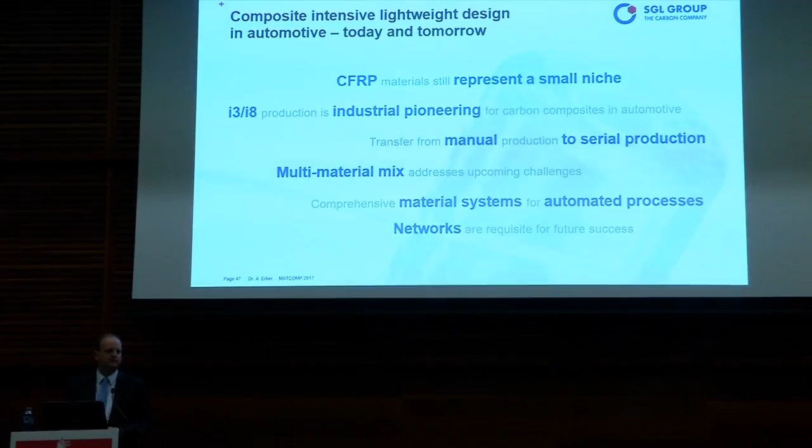Nevertheless, there are some pioneering activities done in the past - i3, i8. The lessons learned are done. New products based on the lessons learned are on the market. We saw, and already see, and still see a transfer from manual production to automated serial production. We cope with the challenges for multi-material design, and there are answers for these challenges. You need the right process chains, but you also need the right materials - and materials means a comprehensive material system.

And what is also very, very important - and therefore, once again, thank you for having me here - you need the right partners. The LowFlip project we had together with Tecnalia; you need the right partners and the right network, because one company alone has no chance. We have to work together, and therefore, again, thank you very much for having me here in Spain at your conference this week. I thank you very much for your attention.